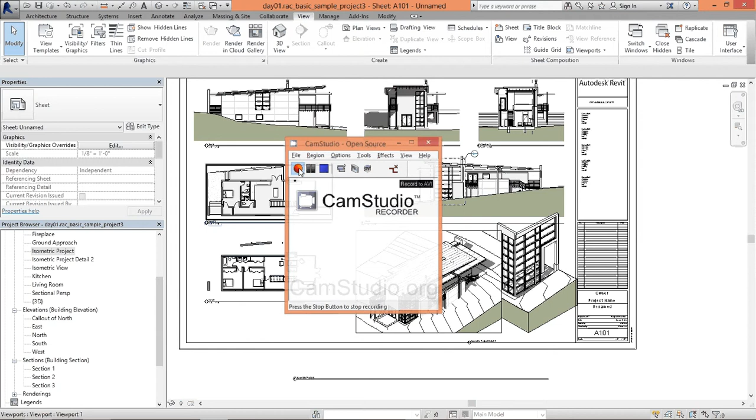Okay, I left it here, so I'm going to continue with the third video on the scavenger hunt. And actually, let's start fixing things. We have to put call outs, etc.

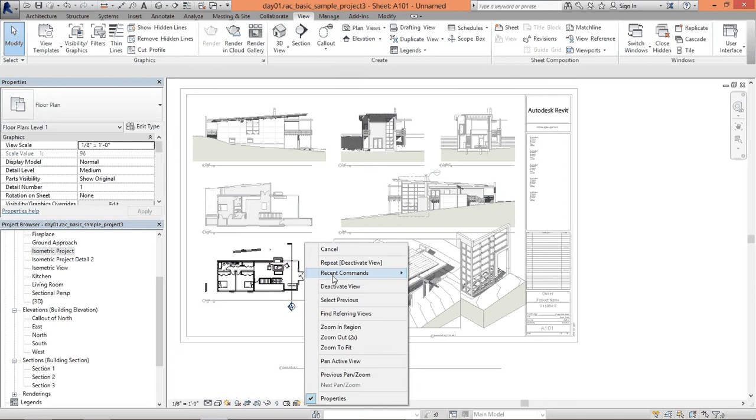I double click here and say no views, but you'd probably want to have one of the sections on. So let's select the section, hide in view category, and turn that off. So it's good, deactivate, right click, to have one section because it's referring to that.

Now here's the thing, you see how that has numbers, 6A101, A101, so we know in what sheet it is, and it's 6. Guess what? That's a 6, so you know where to look. It's the greatest thing in Revit.

Okay, let's move this one a little bit so we have more space for our isometric there. Double click. I'm going to turn on the cropping view, take it out, probably even more. Right click, deactivate view. Good, I don't know if he has shadows. Yes, he has, so we can get there. Nice, I forgot here, double click, turn off the crop region and deactivate view.

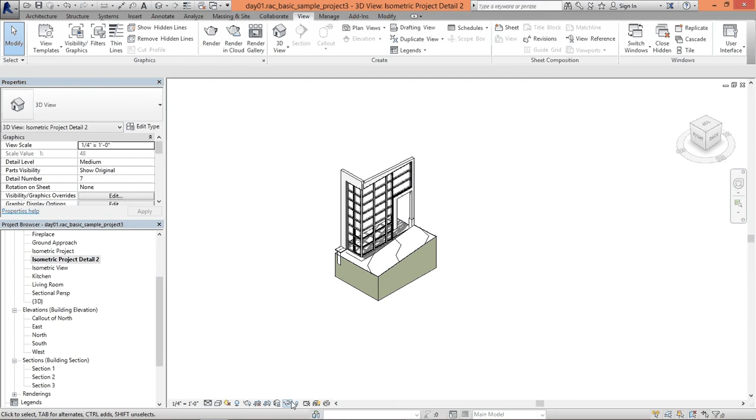Okay, this seems to be a little bit big, so I don't know if we could do a couple things. Let's say, for example, go to the detail here, turn on cropping view, right click and hide category, select that and take this up so we don't have so much space taken in the bottom. Right click, hide category. Let's go back to the sheet, click, there's a little bit better.

I think it's going to fit at this scale if we're lucky. Align it, pretty much good. Now I don't know if this one's going to have to be a bit smaller or that one, I'm not sure, but we can always try. Double click, select the cropping view, make it as small as we can, even in the height.

It could fit, yeah. So right click, actually let me turn off the cropping view, right click, deactivate. That's good, we can align there. Good, and this could be aligned, so we can gain more space by pressing the arrows. There we go, I think this is looking much better.

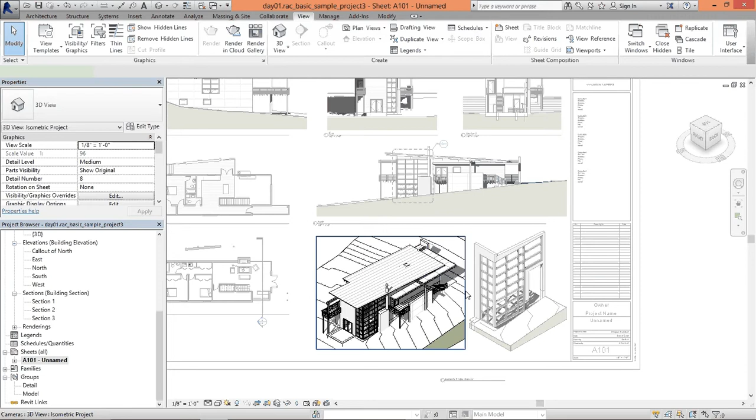Double click, cropping region. I'm being picky, and obviously presenting a project is all about pickiness, so be aware of that as well. Deactivate view. Again, I forgot, cropping region out. Deactivate view, starts getting much better.

Double click, cropping region, let's make this also a bit smaller so we gain space. Right click, deactivate view, let's also snap here to the right. There we go, and that's good there. What we could do is, I think for now, I get rid of that. Right click, deactivate view, we're getting much better.

This one obviously is away from where it has to be, so snap there. Select the view to get the points there, and then move, snap there, snap up there. Select the view to get the points, snap there. So I think we're getting there.

You can always get, hey, I have too much terrain, so turn off the cropping views, select and go a little bit higher, so we got more space for the next one, turn off, right click, deactivate, and you just move it up. Actually, that should be kind of aligned to that one. I think we're doing good. So we can get picky or not picky. I'm satisfied with what's going on here.

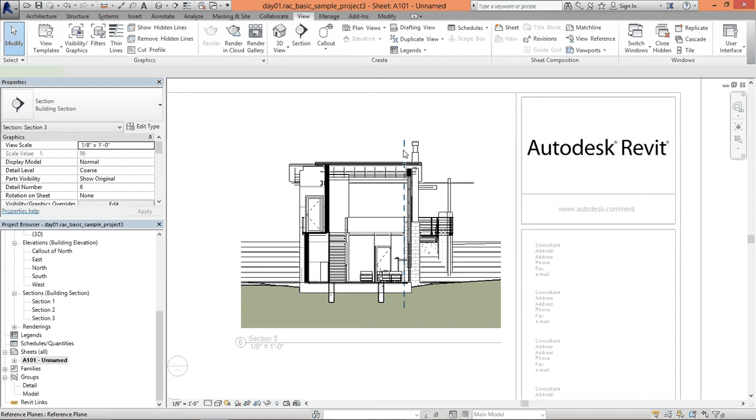Let's start, for example, with things like this line. Who knows what this line was for here? So, but we don't want to see it. Select, I double click, select, right click, hide in view, just say element in this case. Now, deactivate view. Good.

Nice, so I see things like the wall here is in black, etc. Well, those are things that we will see as we go. So let's go for the callouts. So we are taking care of how this element, which is a curtain wall scene, so let's take care of that.

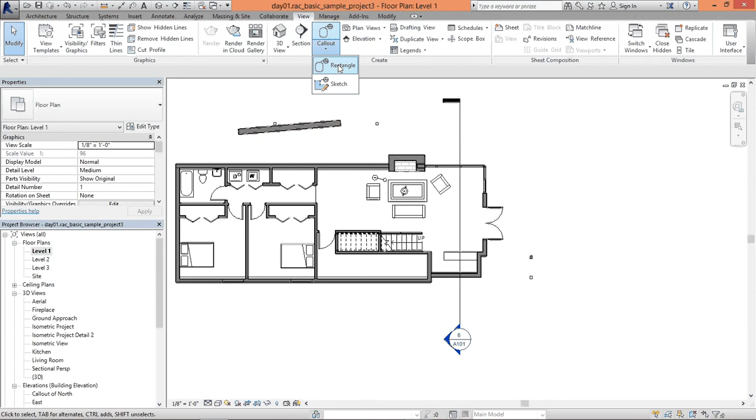Press this a couple times. Okay, so in order to do a callout, the best way is to go to the view, go to the view, call out rectangle, and select an area you want to see. You can change where that is located by selecting these ones. You see how it locates different ways. If you don't like it, Control C and select the top one, which is normally better in terms of how things are placed, no? And you can select that one and move this up and down if you feel it's going to be seen more efficiently.

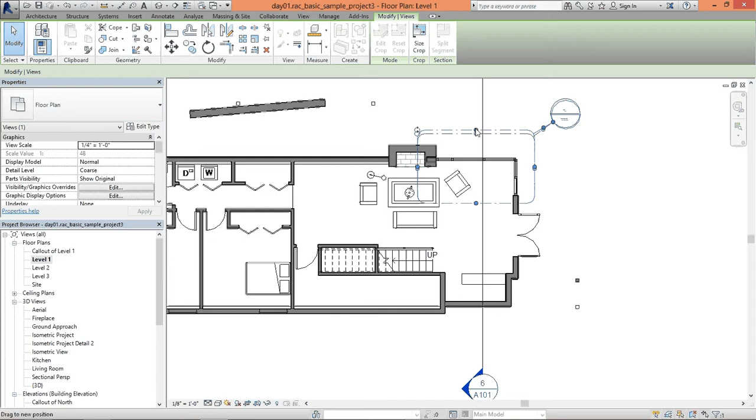Nice. Okay, level 2, we're going to do a similar thing, call out. I'm going to go a little bit bigger and up there in the corner, and I think it should be fine. Now you see how the names are coming now, so we can right click, rename, and call it level 1 curtain wall detail, or leave it as without detail, for example.

Copy and rename this to level 2 curtain wall. Okay, there we go. You see it locates everything according to an organization order, alphabetic order. So those do not have numbers or anything until you start placing them correctly.

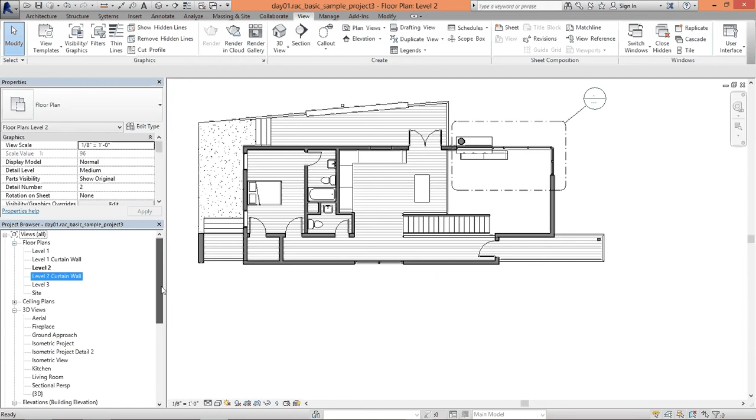Let's see if we do that. Actually, I'm going to go to the sheets, right click, and new sheet. I'm going to select the same one. As you can see, A102 automatically created. It names the number there.

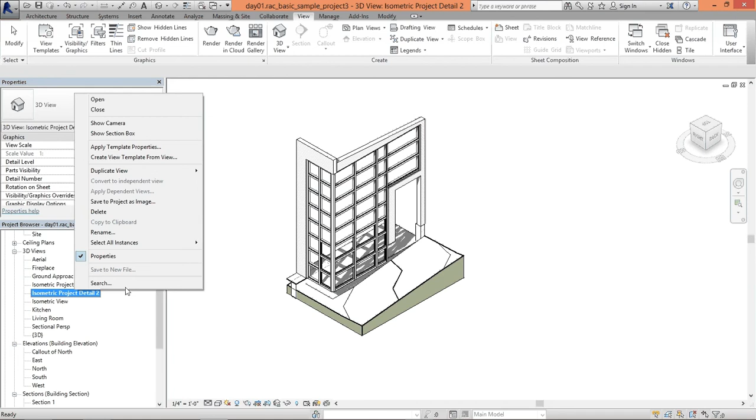Okay, good. I'm going to start dragging things and see how that goes. What I'm going to do is get to the project detail and duplicate that one. Duplicate detailing, right click, rename. It's not 'copy of' - that's not a name we want. Detail 2, detail component or section A.

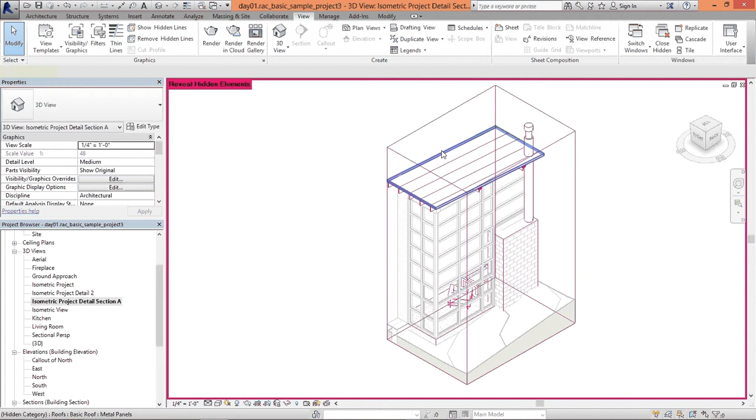You can turn on the crop section and unhide category. There we go.

And what we're gonna do is like 3 sections here. I want to have the top to this area, which has some kind of particularities to that point.

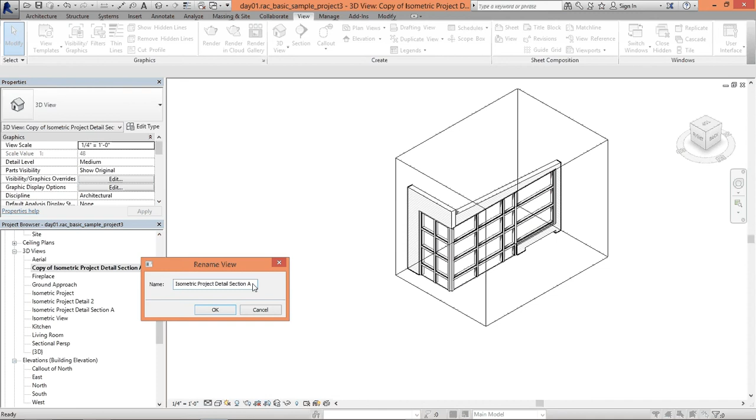Perfect. I'm gonna right click, duplicate, detailing, right click, rename, isometric section B. That could be the center or whatever. Start moving this down, moving the arrows. That's nice.

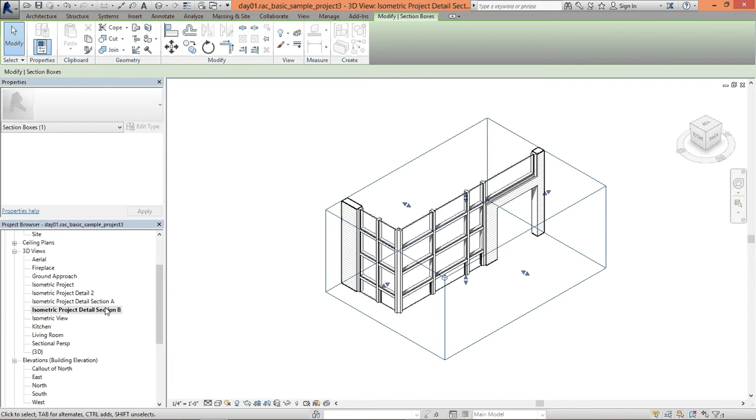Select this area, why not. It's good. I'm actually going to select the ear, right click, duplicate view with detailing, right click, rename - there's a lot of just repetition on things - and section C. Now section C is going to be the bottom area.

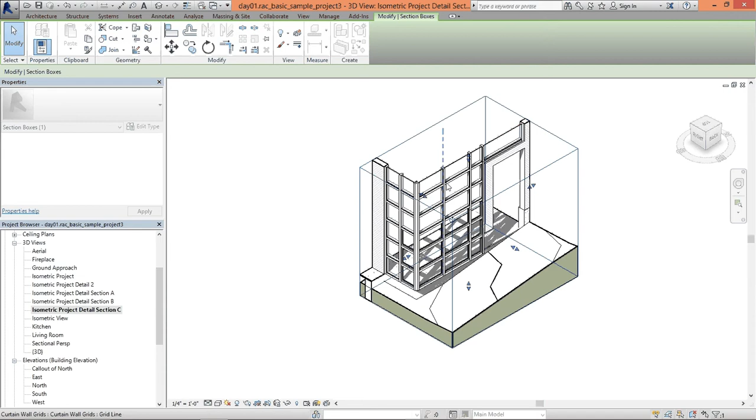So let's get to the terrain even a little bit, and come down to how that meets. Nice, okay. Let's get to that view, section A. Let's get to that view. Save the project. We're getting there.

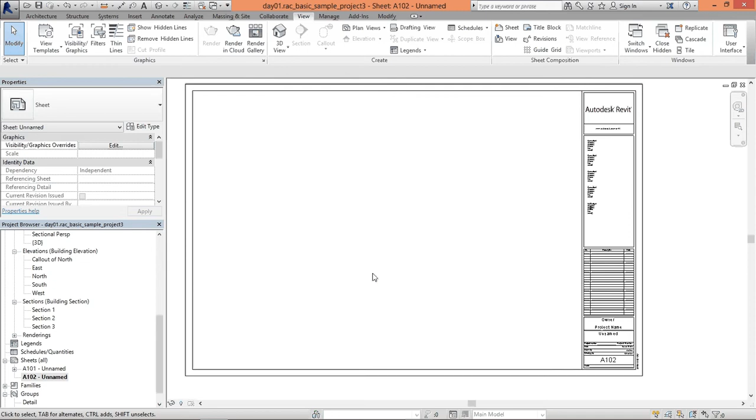So that's good. Let's see how we can start managing that sheet that doesn't have anything. I'm going to drag in the section A. Whether that's big or not, we can double click, and I think a little bit bigger could be good. So let's go 1/2 inch.

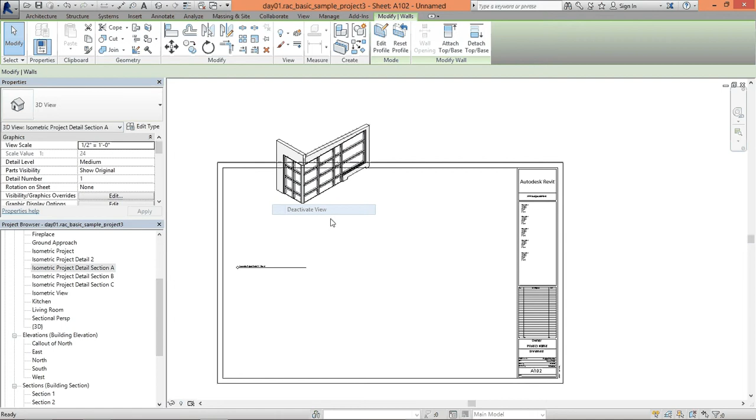Yes, let's do it. No, select that. Hide in view category, right click, deactivate. Start moving that into place. The idea, obviously, is that from sheet to sheet in our story we're actually developing more detail, getting closer in terms of detail. Okay, so I'm gonna just change the cropping view and turn it off.

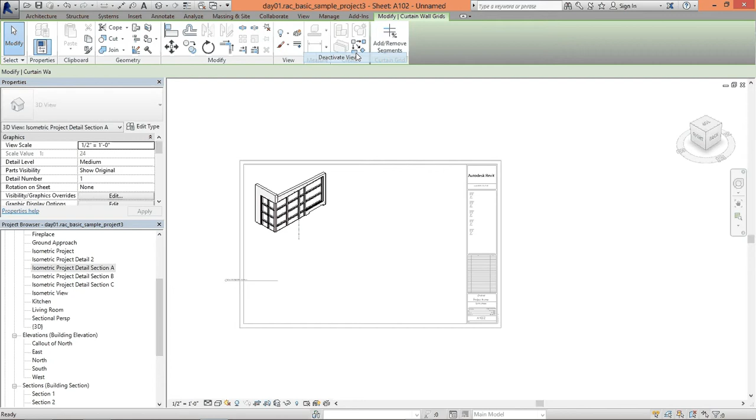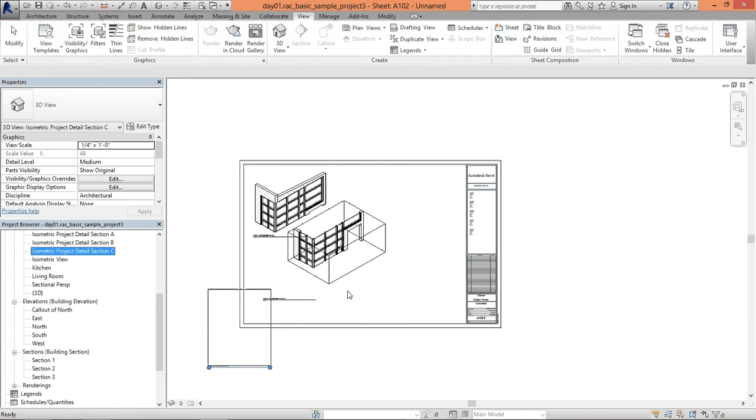Right click, deactivate, and move this one somewhere around here. Nope, just gonna have to click that. Let's go here again, and let's drag that one in. Now we say 1/2, no? Deactivate, and the same goes to this one. Double click, say 1/2. Good.

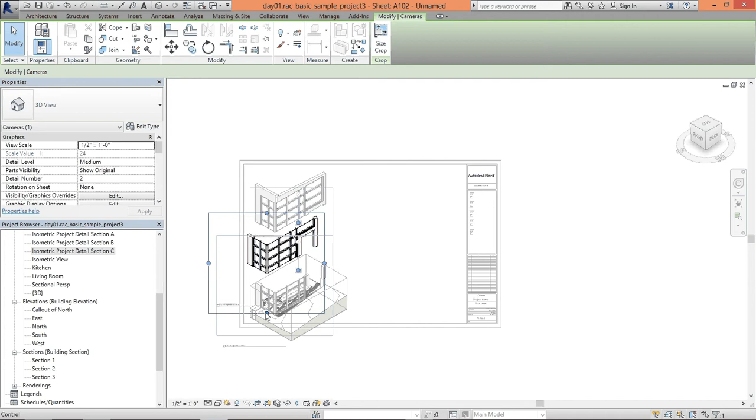Right click, deactivate, and as you can see it's kind of messy, but I think you will get the idea as we go. I do recommend, obviously, turning off the box, turning on the cropping view, start changing the position so we're exactly in the perimeter of our element. Right click, deactivate, double click, select, hide category, cropping view. So as you can see, it's a similar process, just a lot of the same things happening.

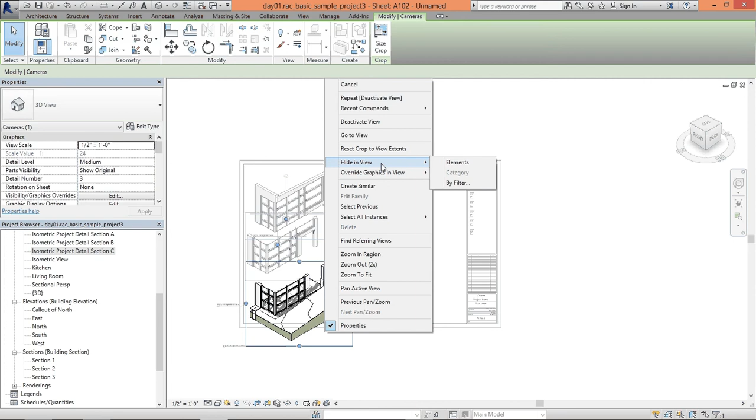What you want to do here is turn off the cropping view, right click, deactivate view. Okay, here I forgot to - there you go - deactivate. You can go up, you can snap, you see how it snaps vertically, snap, so we're gonna have to do some kind of a trick afterwards, but for now I'm satisfied in some degree with what we're seeing here.

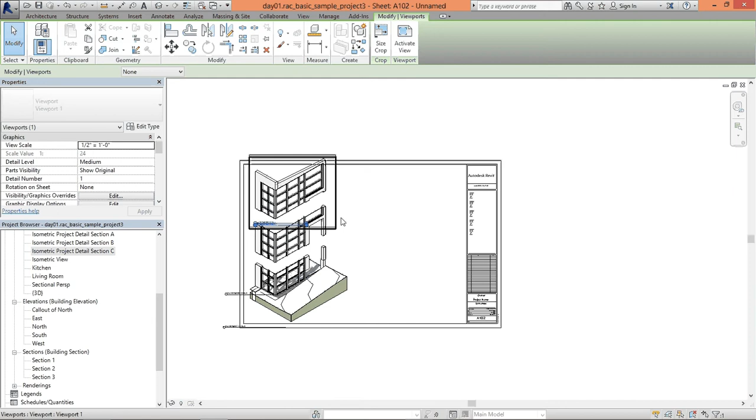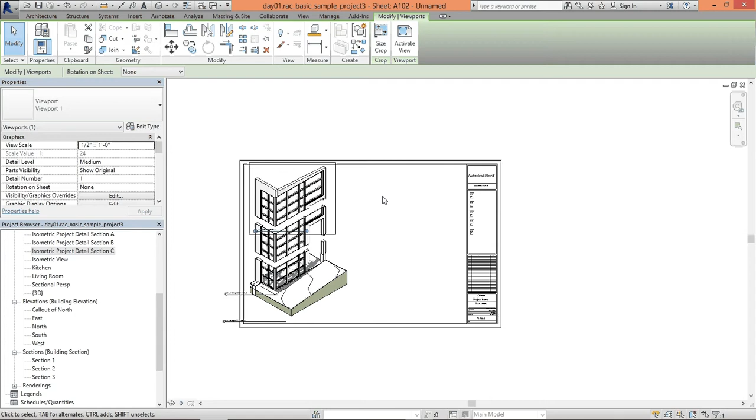Okay, probably a little bit closer. There we go. Now this guy's probably gonna have to be a little bit higher, lower, lower, lower, higher, and moving these guys down. We'll get to that right after, but we can align them, for example, like that. I can pop out that afterwards.

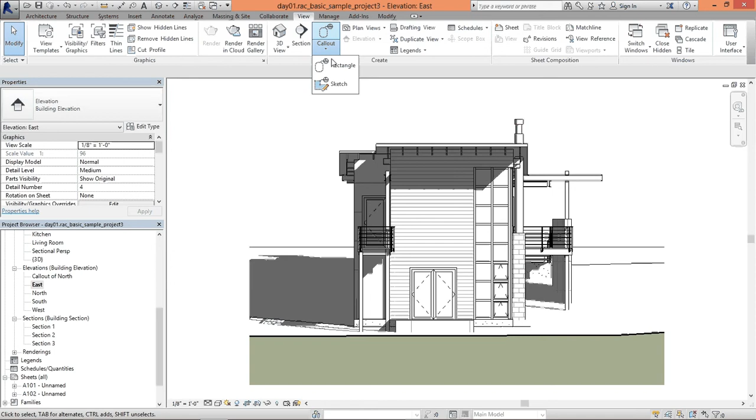Go to the east, callout, rectangle, create a similar callout here. Again, selecting that and putting whatever is going to be seen correctly, getting that, seeing if it fits. I think it fits nice, very nice. So at this point, I want to put this callout as elevations.

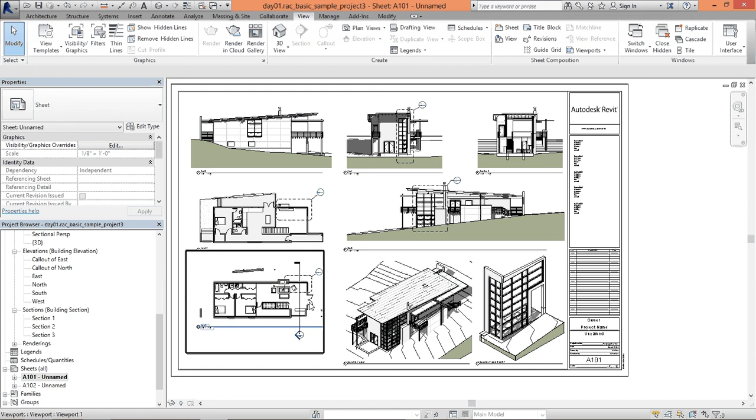And what we're going to do also is place callouts of the plans in that specific new sheet that we created. So let's go with it very fast. Let me go down with these ones. And first, I'm going to put the callouts of the elevation. Callout east. There you go. Callout north.

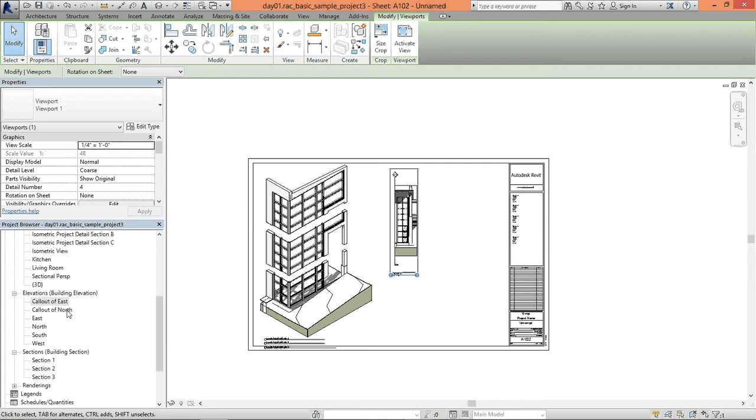And as you can see, they're obviously different scale, but it's a matter of changing things. We'll do it right after. Callout plans, which is level 1, level 2.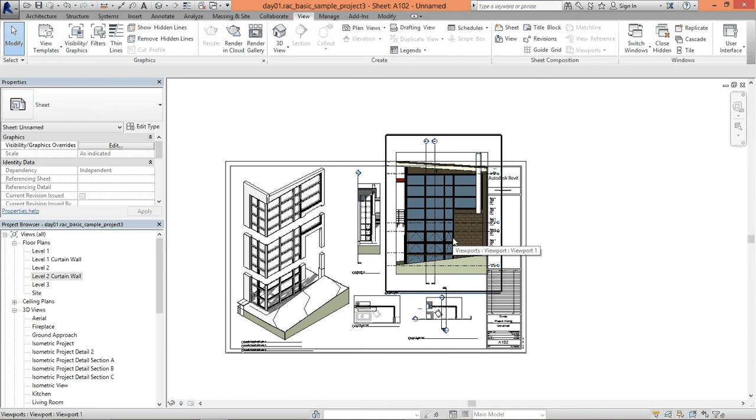Okay, so obviously at this point I'm gonna leave the video here, but you can start imagining what are the next steps. First, making all these 4 the same scale. We're gonna equalize the condition of shaded mode, and we're gonna hide some things that are not healthy to have here in terms of representation. We're gonna make sure that we have another callout sections for this plan, etc., etc. So let's go for that in the next video tutorial. Okay.